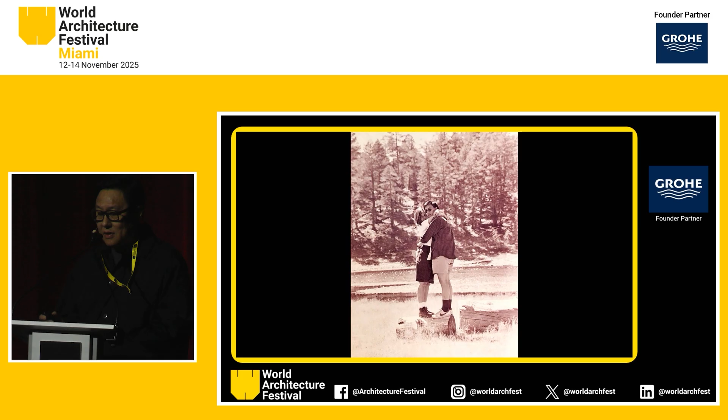Maria and I started a long time ago, and we went to school together at University of Southern California in the 80s. What brought us together was a love of nature. The one thing we learned in those years, at the height of postmodernism, was the conflict that man had with nature. We love making things, and we love getting involved. Our cultures, me from Singapore and Maria from Mexico City, was really an indicator of the way the world was going—moving eventually towards Asia. We could already see that.

When we were at Harvard, at Graduate School of Design, we encountered a very Eurocentric mentality and approach. Maria and I were very much into nature, emotion, the intangibles, and this really was an issue until we met this man, our teacher at Harvard. We learned one thing from Tadao Ando, and that was resistance—to walk your own path.

This is exactly what Maria and I did. We moved back to Asia. We lived in Japan for a few years before settling back down in Singapore and started raising a family in the early 90s. That's where our journey started.

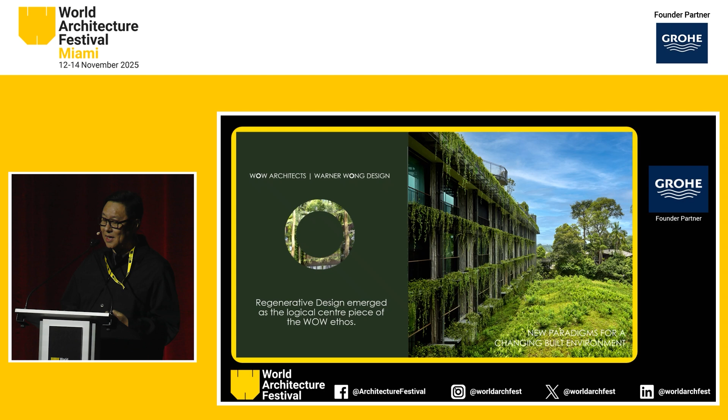Fast forward another 10 years, right through the whole period when sustainability came to the forefront of design, we realized that it wasn't enough. If you accept the fact that our planet is damaged, you don't sustain a damaged planet, you repair it. So for the last at least 25 years, regenerative design has become the centerpiece of the WOW ethos.

So I'll trace back now, in a semi-chronological order, the kind of work that we did and where we are today. In the first 10 years, we talked about integrating architecture, landscape, and interior design for a total sensory experience. We were very keen on doing everything, much to the annoyance of hotel operators and clients who always had silos—if you're an architect, you do architecture.

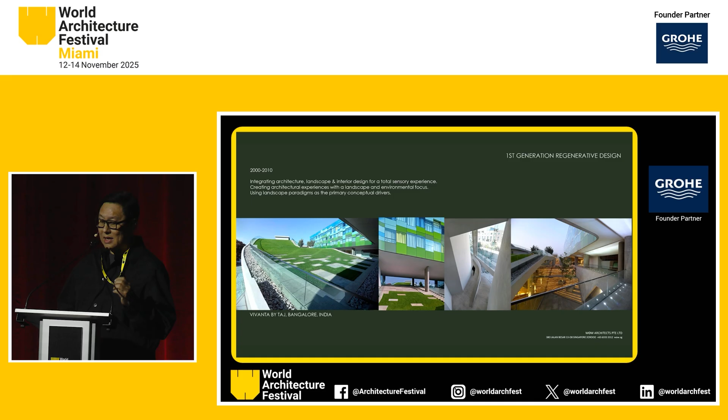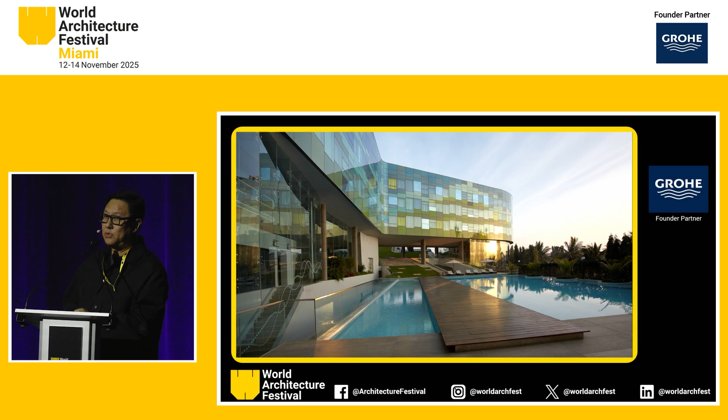So we wanted to create architectural experiences with a landscape and environmental focus, particularly environmental focus, using landscape paradigms as the primary conceptual driver. We found a willing client in Taj Hotels, who commissioned us to do this project, the Vivanta by Taj in Bangalore, where we had the opportunity to really create, for the first time, a totally integrated experience.

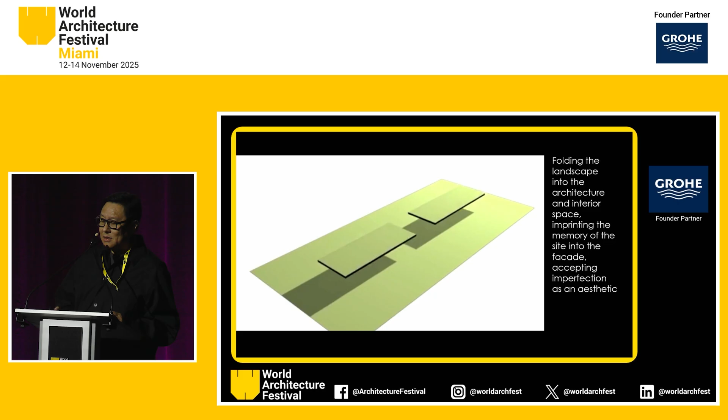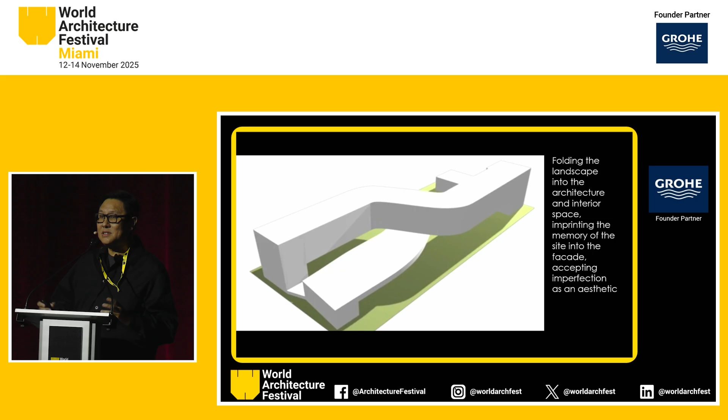We were still very much talking about the language of architecture as we learned it coming out of schools—folding, tectonics, imprinting. We were using the language of architecture to create the first generation of experiences. The way we presented our work was very much about the diagram, about circulation, about all the things you learn in architecture school that you're dying to do when you do your first big project.

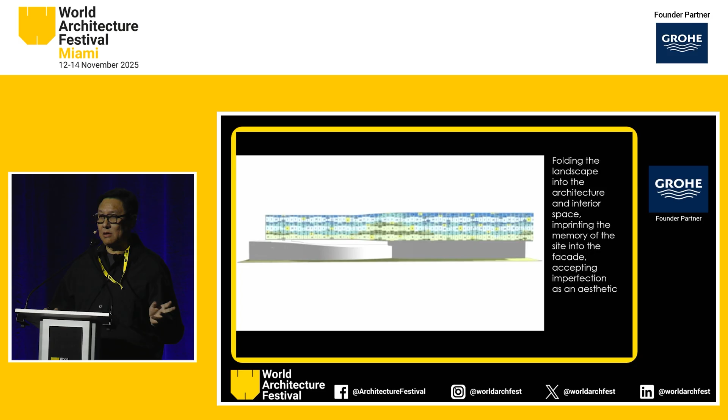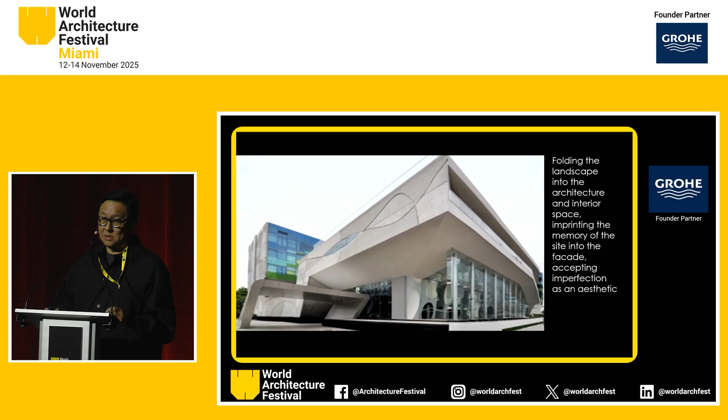So this is essentially the path that we took, and it taught us a lot of lessons. The whole idea of taking the context and making that the facade concept, I think, was a very new idea back then. And the idea of imperfection—we were building in India, right? Concrete was the most imperfect material that was malleable, and we embraced it. These important lessons created this project that drew a lot of attention because of the way that it created spaces.

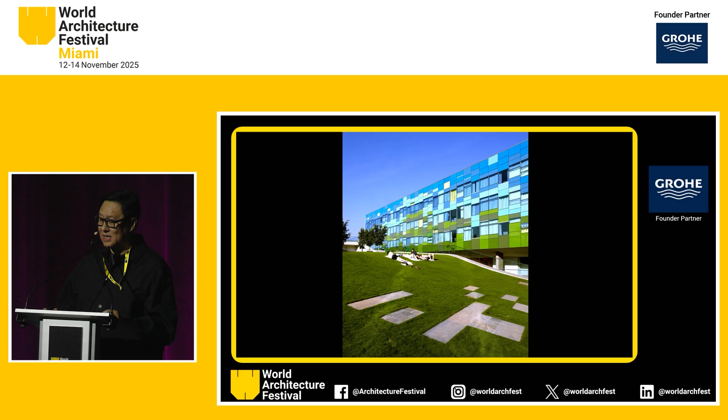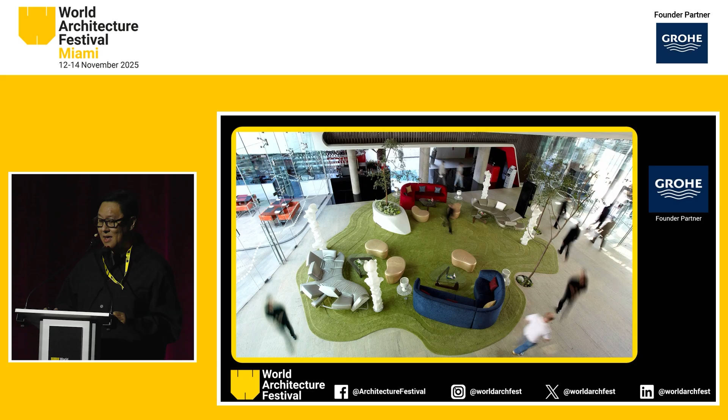We found that it was actually nature and the outdoors that made people happy. So talking back to the previous presentation, the concept of awe, the concept of emotions—this is when we realized it was possible to create these kinds of experiences. Particularly interesting was the connection between the inside and the outside, and bringing nature indoors. So this is the first part of the journey that we had.

Fast forward again, another period between 2010 and 2015, what we call our second generation regenerative design—we started talking more about eco-awareness. We realized that if you don't understand nature, if you don't understand the importance of ecology, you don't really understand how to be regenerative.

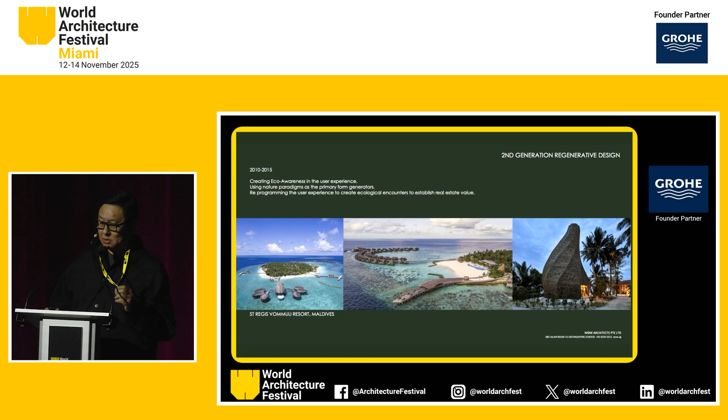So we were starting to use nature paradigms as primary form generators, moving away from traditional design language. We also found that reprogramming the user experience to create ecological encounters gave value, particularly real estate value.

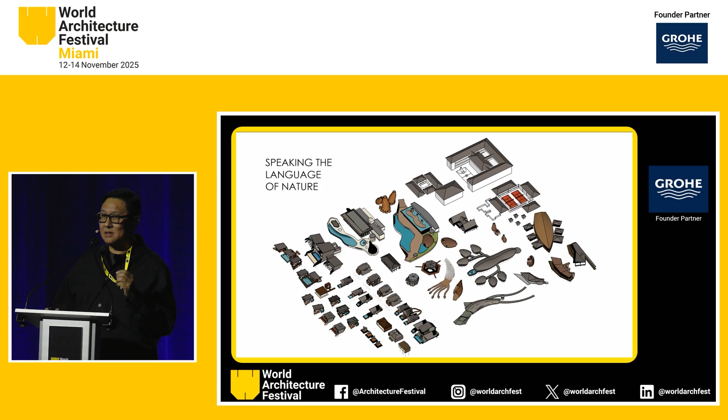So in the St. Regis Maldives, which was our first real ecological eco-awareness project, we embraced nature. This is when we realized that speaking the language of nature liberated us. We no longer had to rely simply on the traditional orthogonal Cartesian way of thinking, and it enabled us to create experiences of surprise while still having a very logical, coherent design language.

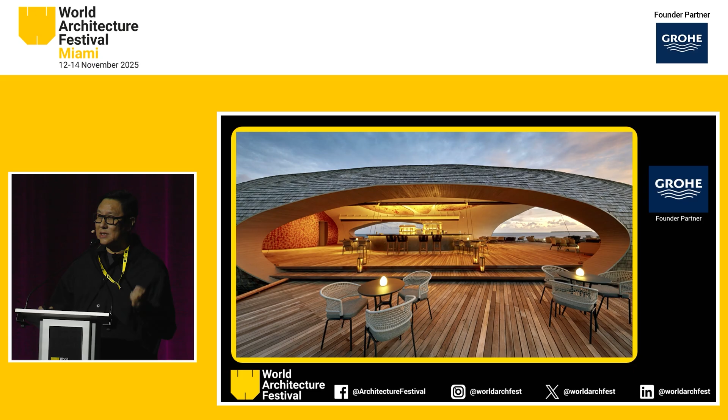In this image, the whole language came about from the ecology of this Maldivian island where the St. Regis is. It wasn't simply about talking about context in its most limiting forms. The feeling you get there is not something you can experience in a photograph. You have to be there to understand how these seemingly simplistic forms create conversations and reach a level of audience I never thought possible.

That's children, right? The kids loved it, and even the adults were drawn into the discussion. That's when we understood that here we are, we now have a possibility of creating legacy.

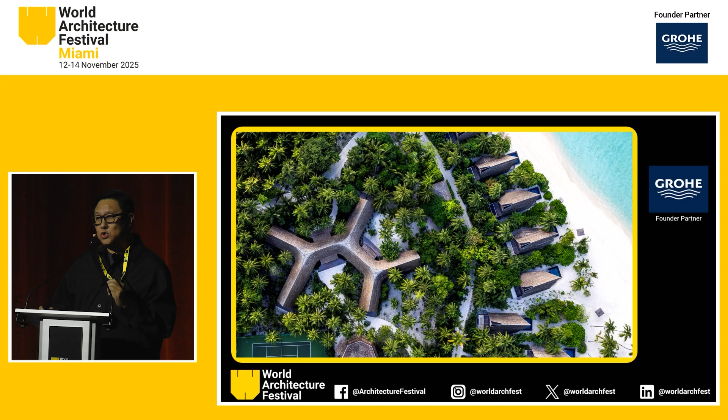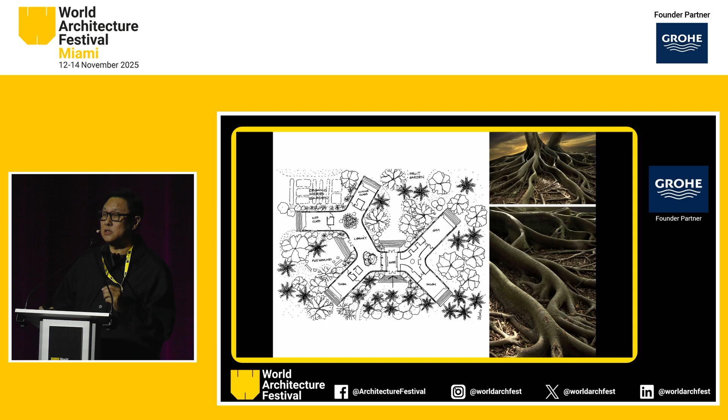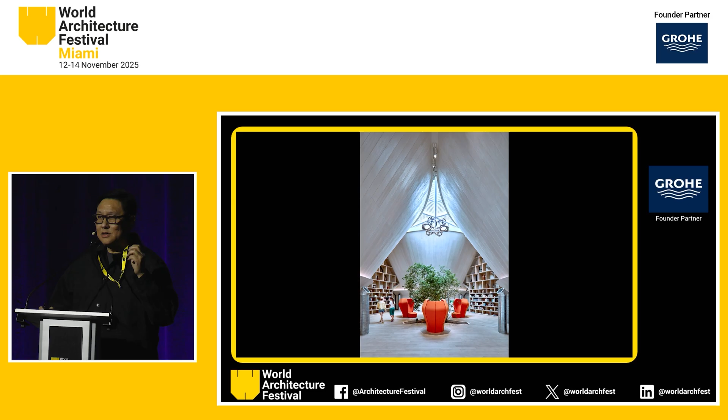In every hotel you go to, you have this thing called the Kids Club. We decided not to call it a Kids Club, but a nature discovery center. The design of the building took its inspiration from the banyan tree on site, but more importantly, what we created was a collision between architecture, programming, and user experience that was nature-based and evoked emotions for the whole family. This was a very successful strategy because now children would ask their adults, hey, what is this all about?

Where are we going? This was a revealing moment for us. 7, 8 years later, after the opening of this resort, it's still doing very well and still creates a lot of conversation, and we're very pleased about that. It's about this discovery, how you can take the most common object or artifact and create a conversation out of it, whether it's tumbled glass on the beach recycled into a chandelier or coconuts used in an artistic way.

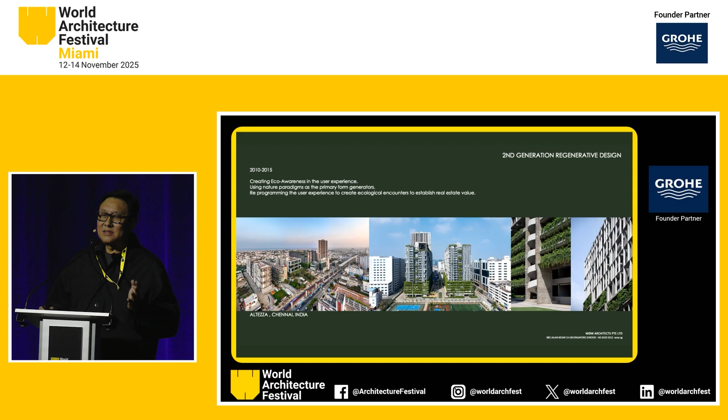Now, what about the urban context? In urban context, you still have zoning codes, FAR. Sites are rectangular or squarish or some variation of that. How do you actually do regenerative design in such a context? Well, in places like India, where we have a lot of work, we took on this challenge and realized it was not about the shape of the building that counted. It was how the user used the building or lived in it, how transformative it was for them.

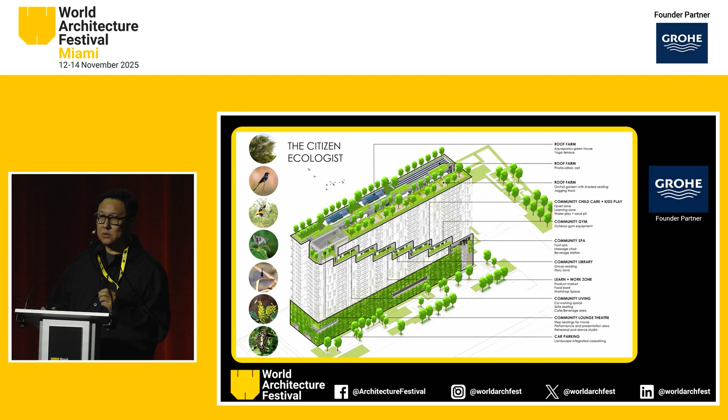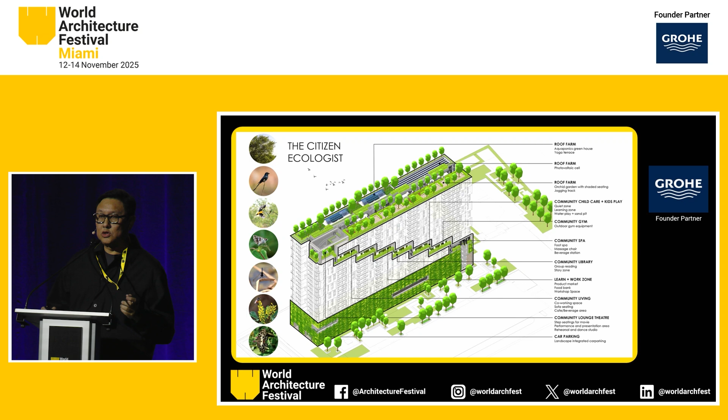So we started thinking about the concept of the citizen ecologist. Everybody who lives in this project has an opportunity to contribute. We took the landscape concept, the ecological concept, and the user experience, and linked it throughout the buildings. A series of stepped gardens, community gardens, took you up to a rooftop urban farm.

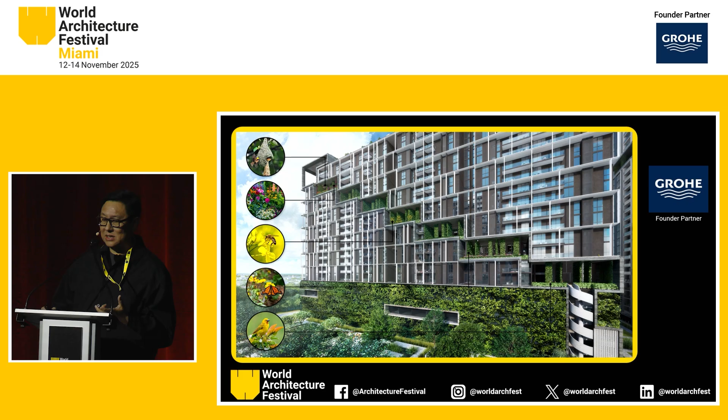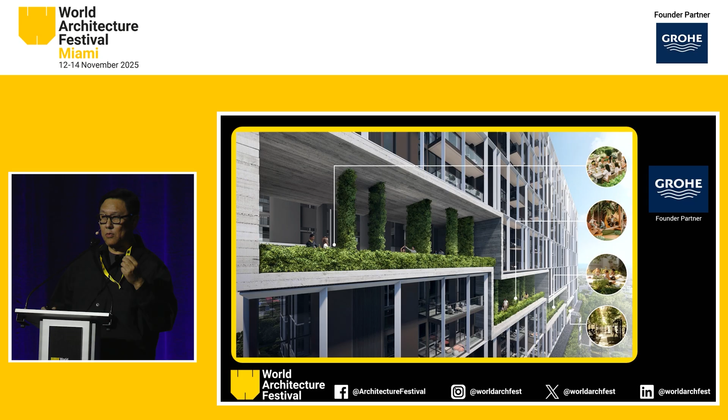What this did was essentially create an opportunity for landscape and ecology to proliferate. Here we're talking not simply about planting, we're talking about insects, avian species, mammals, bees. This educational and interactive community experience started building citizen awareness of how important the ecology is for everyone. When you have that, the community building gets much more intense, the discussions get more relevant, and you're building a legacy for the future.

These projects then took us into another realm of thinking, what we call our third generation regenerative design. That is embracing regenerative design as the primary way to repair the built environment, and whole system ecological thinking, including bringing living systems and integrating them into the built environment. This is a whole different language of discussion, to stop thinking about the building as an object, but as a substrate onto which living things grow or craft themselves or meld themselves. Reevaluating daily materials like concrete, wood, and steel, and thinking how to achieve whole system design and engineering using materials. This inevitably leads to climate and microclimate engineering.

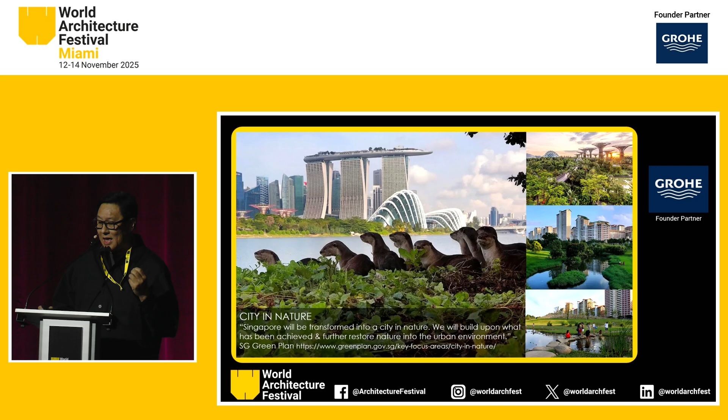Which brings me to this project I want to share with you, the Mandai Rainforest Resort. Some of you may have been to Singapore - we started our journey 60 years ago as a garden city, and in the last 60 years, we have evolved to now being a city in nature. It is our agenda as a country and as a population to live closer to nature. How do you do that? The project we were commissioned to do, having won an international design competition, is this eco resort, which is in the heart of Singapore.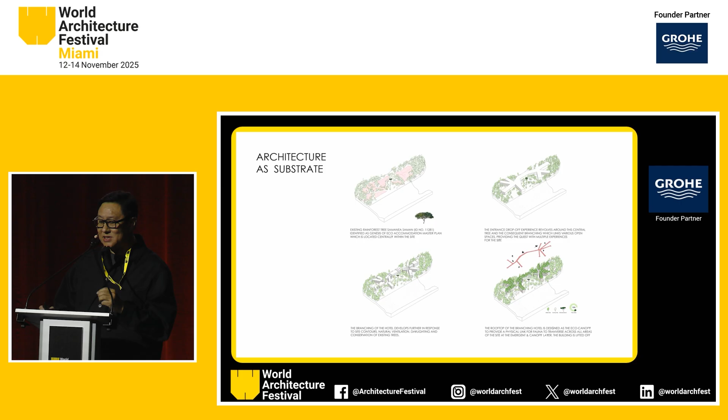It was a vine, a liana, that creeps its way through the opportunities on the site. No specific form, opportunistic as nature is. So this is architecture as a substrate, not object. And if you take a look at the site plan, you can see here that the idea is eventually you wouldn't even see the building at all. It would be completely absorbed into the jungle.

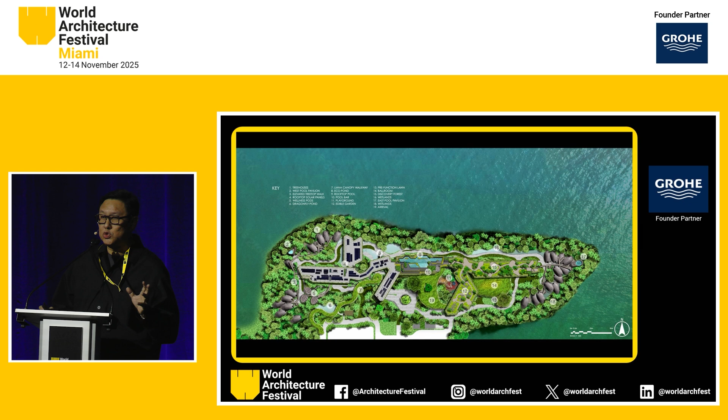This also required a change in the way we use the building. If you go to a typical zoo, this is next door to the Singapore Zoo, you have animals penned up safely, and you walk around and gaze at the animals. Here we had a total paradigm reversal or shift. We put the people safely within the building, and we allowed the animals to roam around us. Quite the reversal on how we interact with nature. Normally you look at nature, but here nature looks back.

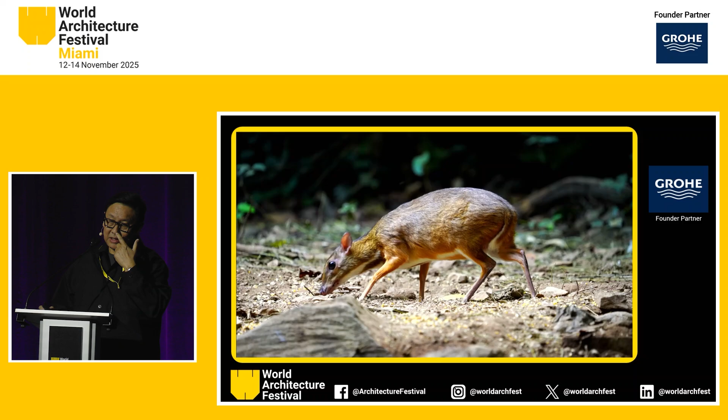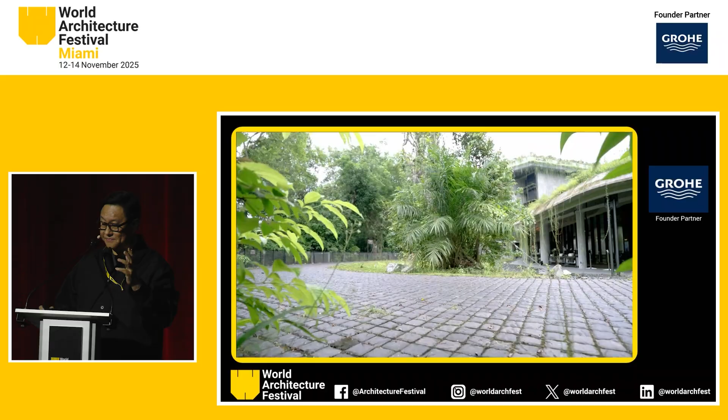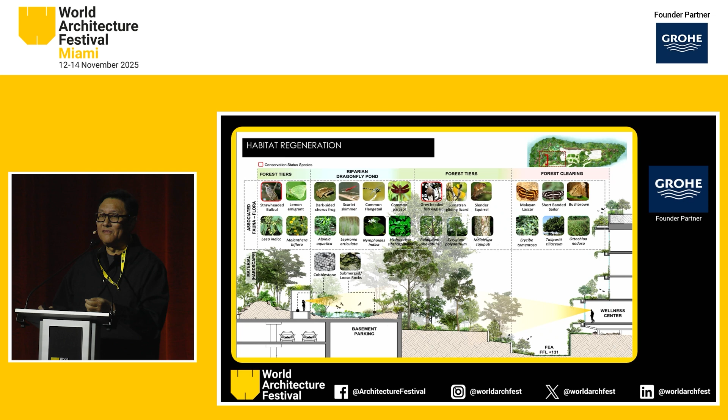So we not only designed it from a human's point of view, we designed it from the point of view of the real citizens and denizens of the jungle, how they would interact and look back at us. It was a revelational moment for us and a humbling moment, because we no longer spoke like architects or landscape architects. We needed to speak like ecologists, as people who embraced flora and fauna and understood microbial activity, the value of soil, how important soil is.

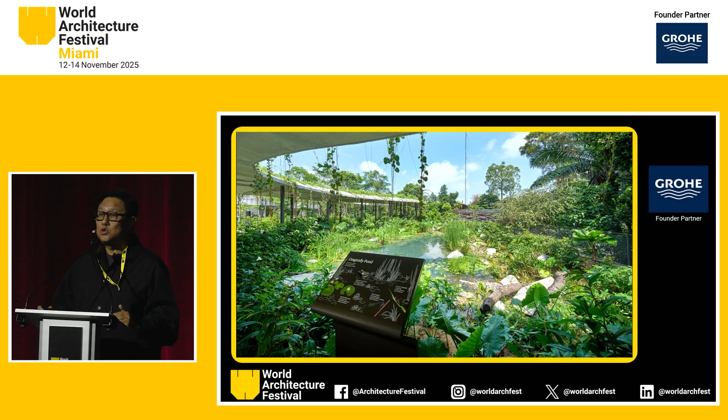And how, if we understood the power of nature, we could harness it. We don't have any chemicals on this project to control mosquitoes. We actually used dragonflies. So we created a whole series of eco ponds where we encouraged the dragonflies to grow, and they were the natural mosquito killers. This is important to us because, at the end of the day, impacting the hearts and minds of the people and future generations was much more important than any architectural design statement we were trying to make.

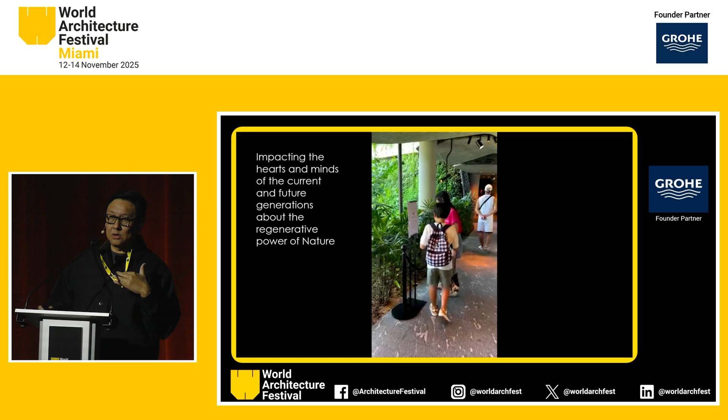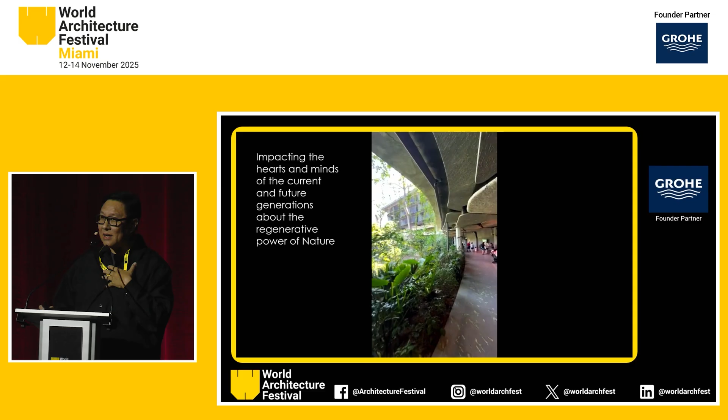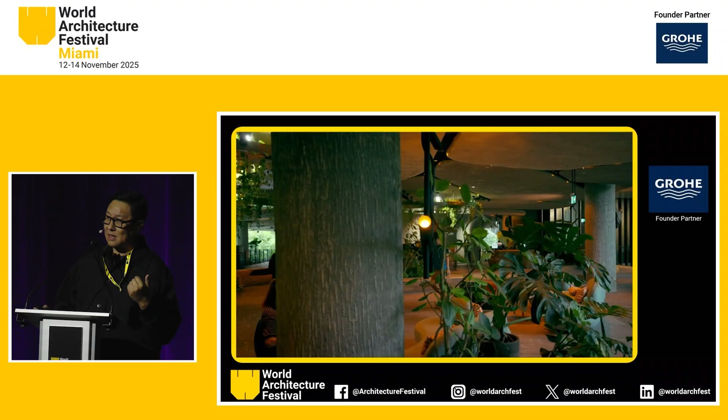The building receded into the background, and what was more important is how nature comes to the foreground. We were blown away. For example, within 3 weeks of opening, this bulbul family came to nest in the lobby and hatched younglings. It was a very humbling moment to see this, and how the people who saw it felt awe and felt healing and bought into the whole story. So I think this kind of attitude is really the heart and soul of what a regenerative design project is, bringing the outdoors into the building, letting nature come in and create the dialogue and create the centerpiece of design.

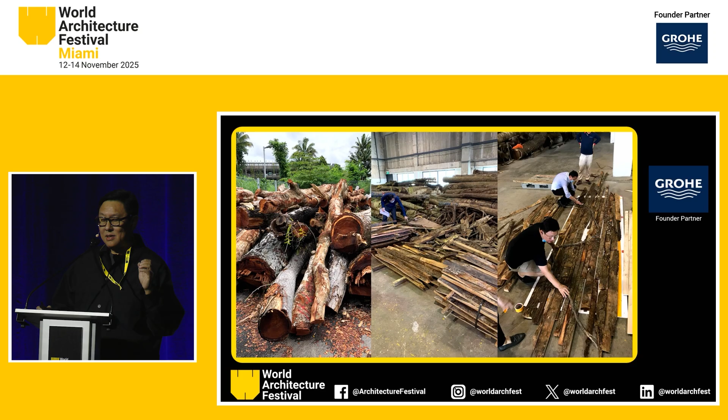So what do we do, and how do we do this as architects responsibly? Singapore has no natural resources. Well, wait a minute, we actually did have natural resources. The trees that we cut down were a resource. So rather than sending it to the scrap heap, we recycled 100% of it. Even the tree bark, which we then turned into the formwork for casting the concrete, so that we imprinted the memory of the jungle, the actual vines onto the concrete, and it became the experiential aspect of the project that was a living memory of the jungle.

Diversity. Not just diversity from a humanistic point of view, but biodiversity forced us to think about universal access. Universal access not only for humans, but all the creatures of the jungle who were free to come into the resort. So be prepared for snakes.

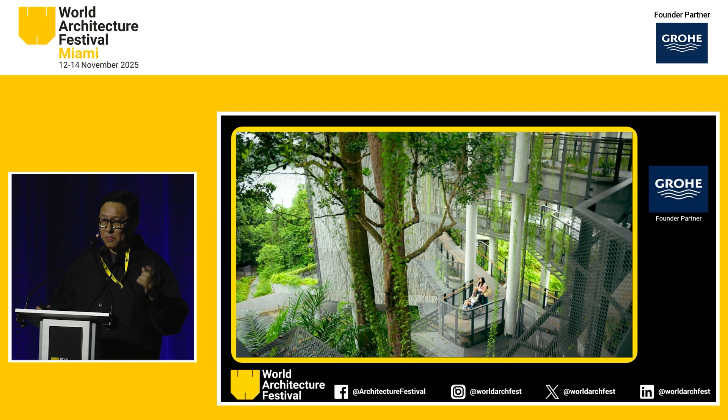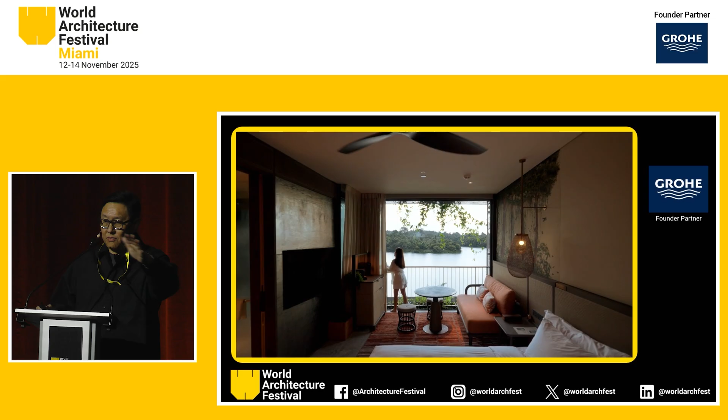And it was all about internal spaces as well. What is an internal space in this regard? Well, we turned every room into a veranda. If you know what a veranda is, it's an indoor-outdoor room. And we gave the guests the choice to actually control the amount of energy they use. They could completely just live with the warmth, or they could augment it with cooling. We wanted to give choice the responsibility of the energy utilization.

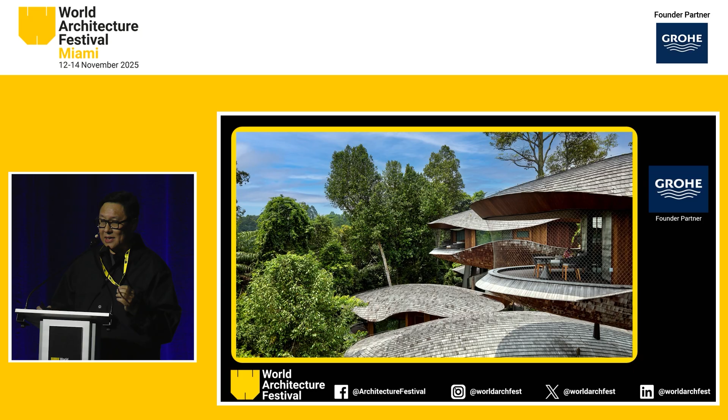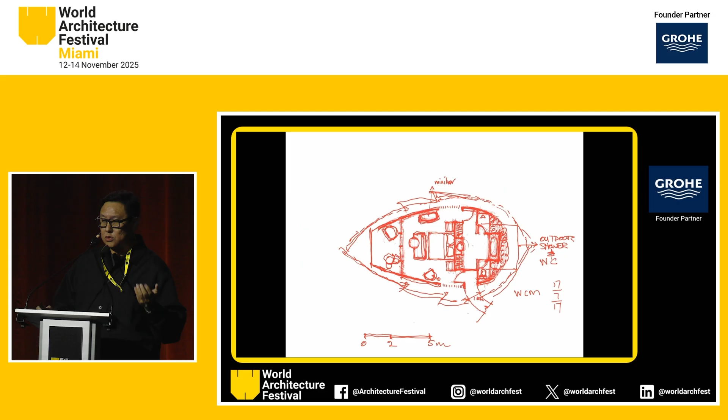Now, part of the resort is a typical hotel room. There are 338 keys here, but 24 of them were tree houses. And the tree houses took on a metaphorical narrative aspect, which is, in this case, the seed pod. What we wanted to do here was use the seed pod as a mnemonic device that spoke about the opportunity of being in tune with nature.

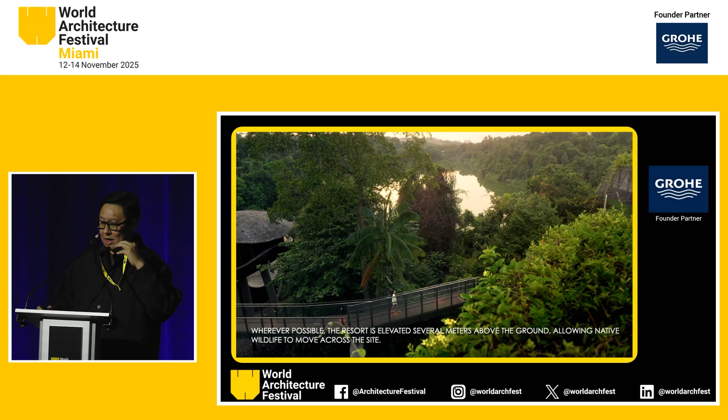So these tree houses are elevated on stilts. They occupy the deepest, densest part of the jungle. And at the end of the day, it was also an opportunity to showcase technologies that have been around for a very long time that maybe we took for granted.

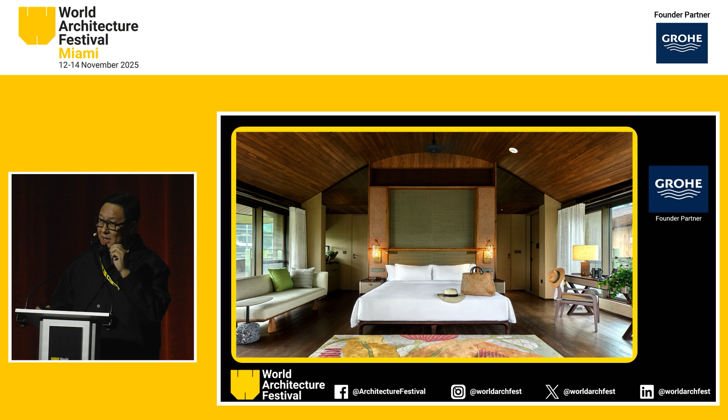We used passive displacement ventilation in this case. It wasn't about the regular air conditioning system. Your body heat generated convection currents that cooled the room and used 40% less energy, if you decided to use it. It wasn't about cooling the space, it was about cooling you, the occupant.

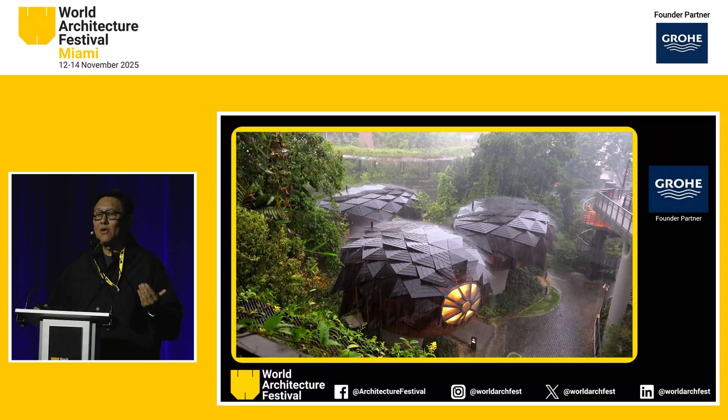The other thing that was very important to us was embracing all kinds of conditions. It's called a rainforest resort for a reason - it rains a lot. We wanted it to be as beautiful in the rain as it was in the heat. And water as a resource was educational - we wanted the children in particular to see that water could be harvested, could be collected.

So, talking about the sustainability initiatives, it's Singapore's first super low energy resort. Solar, of course, rainwater harvesting, of course, but more importantly, what we wanted to do was create a whole system ecology within the building.

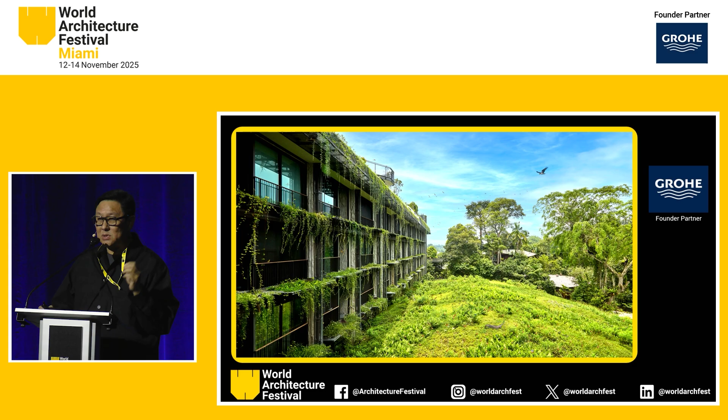So 6 months into it, it's already pretty lush. 10 years later, we hope the building won't even be seen. And so this requires us to really have planned for the ecosystem that would come back to it.

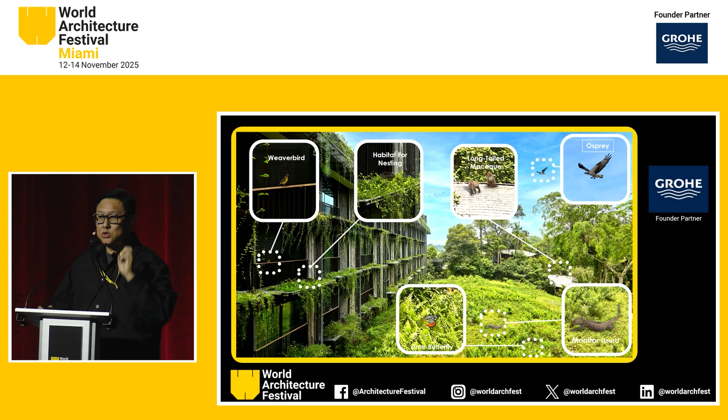Certain animals, like colugos, are residents of particular trees. You cut down that tree, that guy may never come back again. So this is a very key understanding that we have. When you speak the language of nature, you have to be sensitive to a lot more than just humanity and human beings.

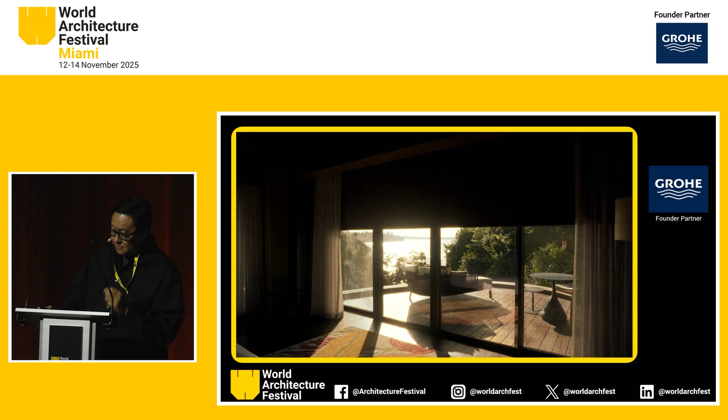So I'll come now to the final part of what I want to share with you today, looking forward into the future. So these are statistics which we did some research on. Global building floor area is expected to triple by 2060. That is the equivalent of adding an entire New York City every month for 40 years. And a lot of this is going on in Asia and in the Middle East.

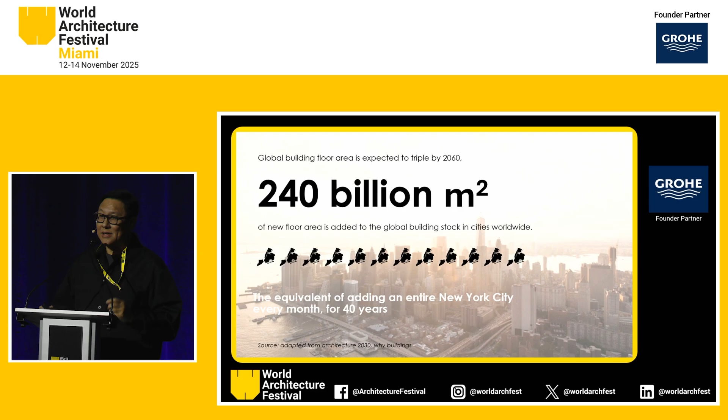Forest coverage is at a tipping point. We have 1/3 of the planet's land, and the net loss per year is still more than anything we can plant back artificially. So we're experiencing the loss of our forest coverage every year, year by year.

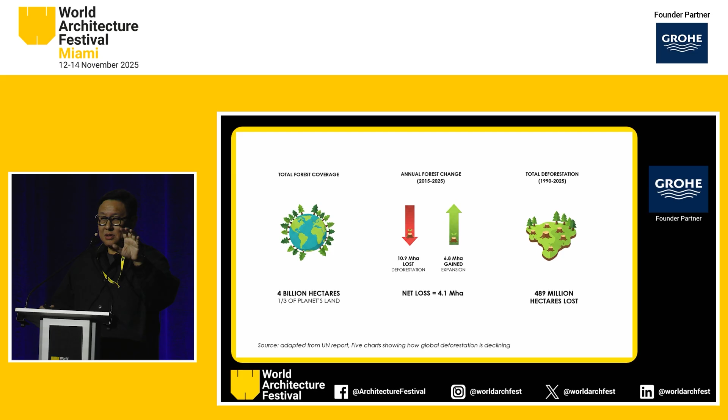But we can't stop building, can we? After all, everyone deserves a home. We can't expect the people in Africa or in India to not be urbanized. So what do we do now?

Recognizing the need to totally review existing policies and practices and repurposing the economic equation in the built environment is a thing that we all have to do. We really need to relook at all of this in order to achieve regenerative design outcomes - exploring, researching, and testing policies and paradigms to create wholesome built environments by going back to basics.

This is a must-do. So I would encourage architects, landscape architects to work together and go back to basics and relook at how we do the built environment.

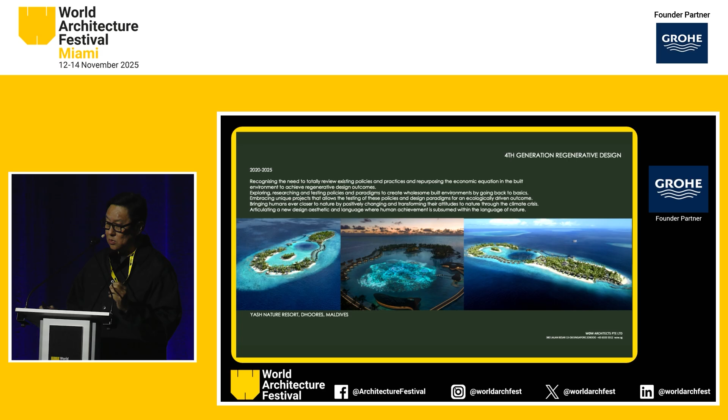And so we at WOW, we want to embrace unique projects that allow us to test these ideas - by bringing humans ever closer to nature, by positively changing and transforming their attitudes to nature through this climate crisis, articulating a new design aesthetic and language where human achievement is subsumed within the language of nature, not simply the language of design that we're used to.

So climate, resources, land use, coastal development - these are issues of urbanization as we build cities, particularly along coastlines, as sea levels begin to rise and more violent hurricanes and typhoons come along. We really need to rethink how we do the physical placemaking.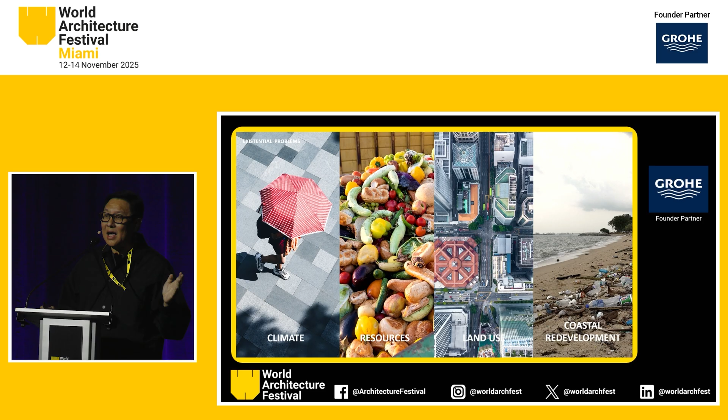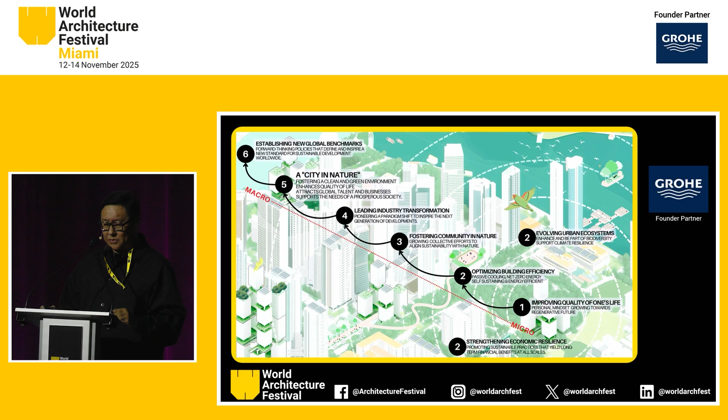That will inevitably come. So taking our lessons that we have learned a lot in Singapore, the one good thing about Singapore, as some of you who have been there know, is we have strong government and we have strong government involvement in the built environment.

So this has forced Singapore architects to really get involved: improving the quality of one's life, strengthening economic resilience, which is very important for the built environment, evolving urban ecosystems, the morphology or shape of the city, and fostering communities in nature.

Singapore has 320 kilometers of nature trails on our small island, leading industry transformation. How can architects, through discussions in industry, affect the outcome of the construction industry that we depend on to do our work? These are conversations that need to happen in order for us to create cities in nature.

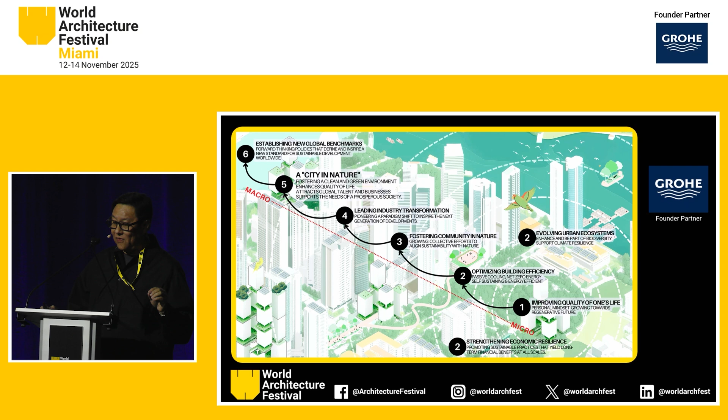All cities should be cities in nature, in order for us to create new global benchmarks. New global benchmarks is what we need. And this is a diagram that says a lot, I think, about every city.

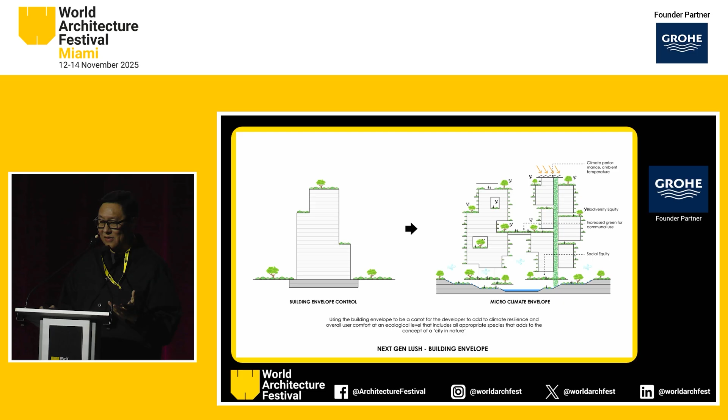Building envelope controls are pretty standard in many urban environments. The planning regulations dictate what you can build. But what if we were able to deconstruct it using other criteria? Climate, for example, bringing user space up into different levels, rejigging the jigsaw so that we created a much more inclusive and open architecture that utilizes resources.

And we need to incentivize the developer. No one's going to do anything for nothing. So if we give them enough incentive, particularly in developing countries where planning regulations are much more backward, I think you will see good outcomes.

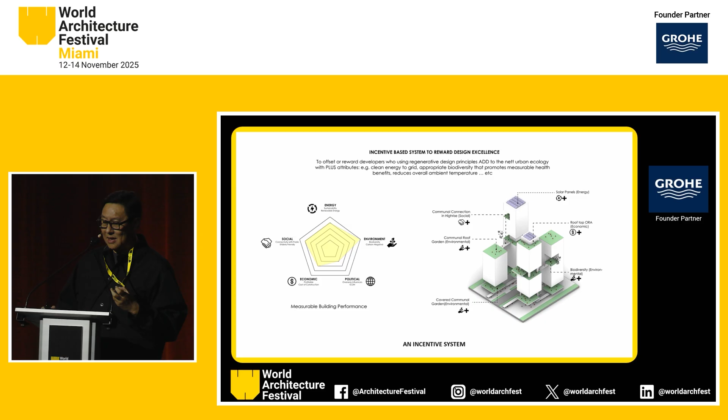So for the projects we're doing in places like India and Indonesia, government agencies need to partner with us to create these new ways of thinking, in order to create the reward system to encourage them to be regenerative.

Right now in Singapore, we used to think 50 years in advance. We thought that was enough. But if you're looking at planetary change, like cutting back 2 degrees centigrade, 50 years is not enough. You have to plan for 100 years. And all of us are involved.

You are the citizen ecologists, and your clients and the end users of your projects are all participants in this. So we think that, while we are promoting this in Singapore, we aim at cooling the whole island. Imagine being able to cool the whole city, because then you can really combat climate change. It's not building at a time, it's a city at a time, right?

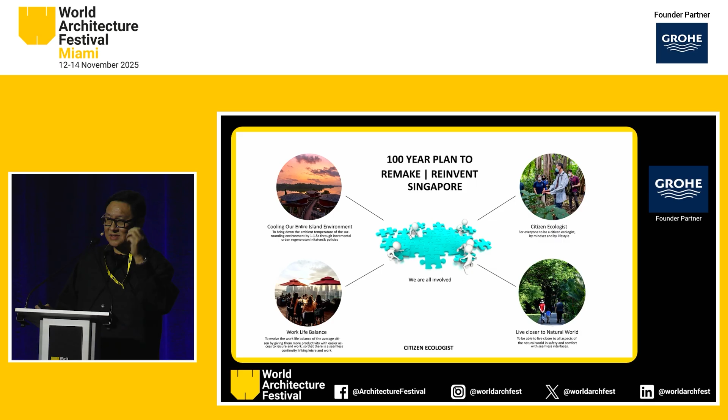So what will this look like? I think this is when design is really powerful, to create visualizations of new ways of living in these urban morphologies that we could create - 3-dimensional green cities that could really change the way we look at habitats, ourselves included.

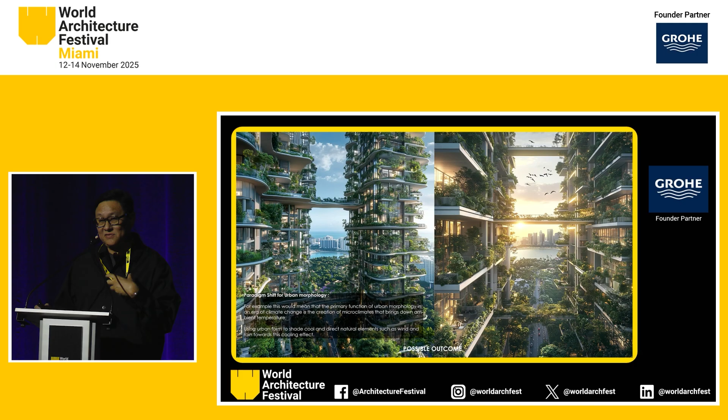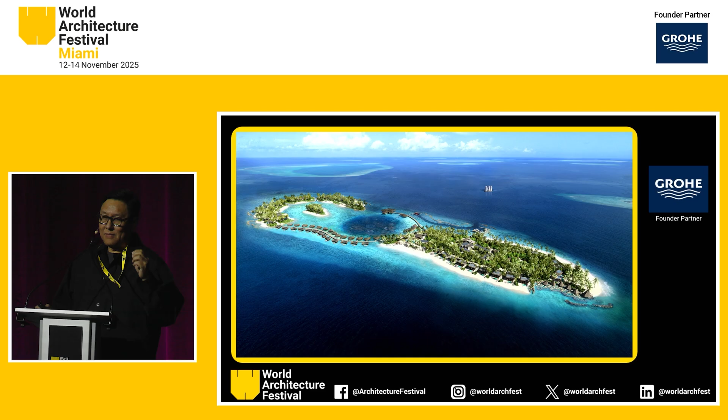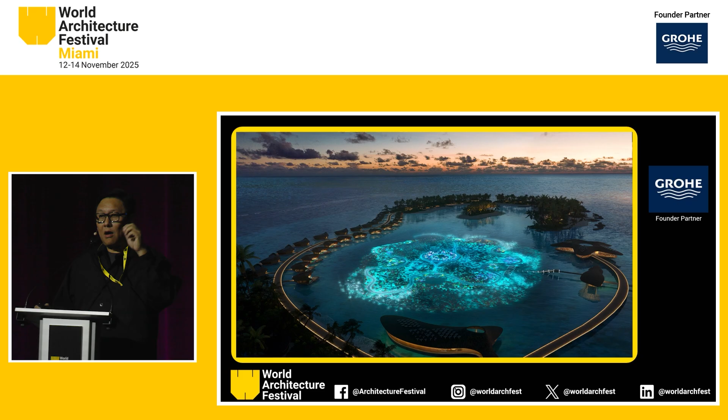We also have some interesting projects now in coastal areas and remote locations like islands, where we not only go in and develop islands, we create islands out of blue ocean - literally blue ocean technology - where we have the opportunity to not only design on the terrestrial aspect, but even in the marine aspect.

Land is like a pyramid - just the tip of the land above the ocean is what we deal with. What happens to everything else underwater? It's a continuity. So architects stop thinking at the coastline, but we shouldn't. We should continue our thought down into the oceans, because that's where life is.

And so in our projects now, we think about how we can address underwater environments as well, planting underwater gardens that regenerate coral reefs. This sort of thinking, a much broader scale of imagination about the possibilities and the engineering required, is really going to be the forefront for what we do.

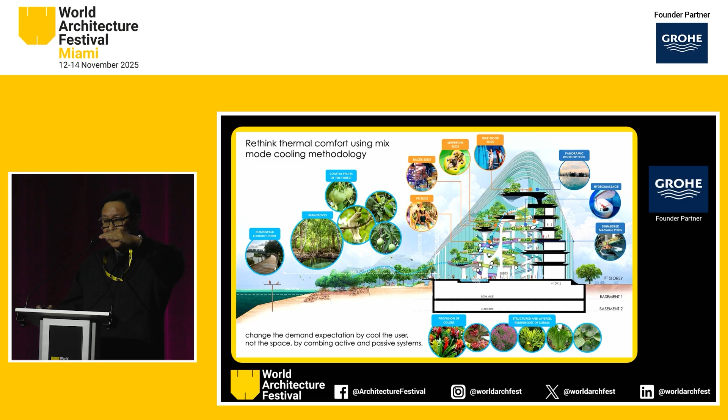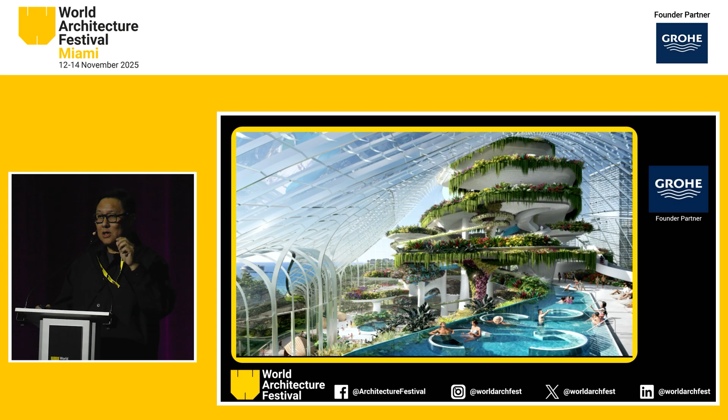When it comes to building buildings, it's no longer enough to think about the building envelope as a climate-controlled device. We have to rethink thermal comfort completely, with a mixed mode cooling methodology from the ocean through the landscape up into the building. So our projects now take a much more ambitious approach, where we are not cooling the space per se, but cooling the occupants in the space using various passive and active technologies for thermal comfort.

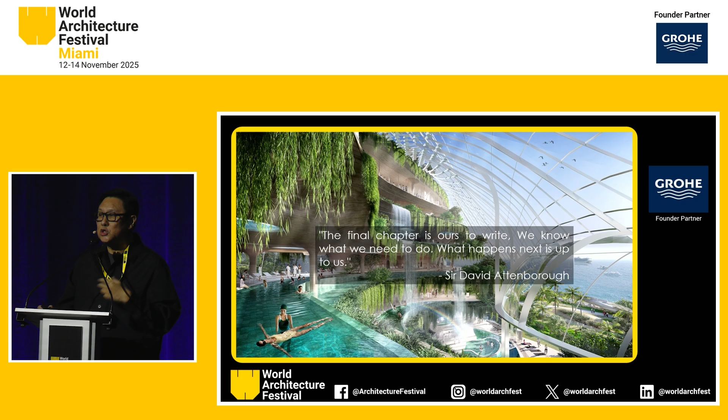So to conclude, I think this says it all: Sir David Attenborough said, we know the problems, and what we do next is really up to each and every one of us. Thank you.

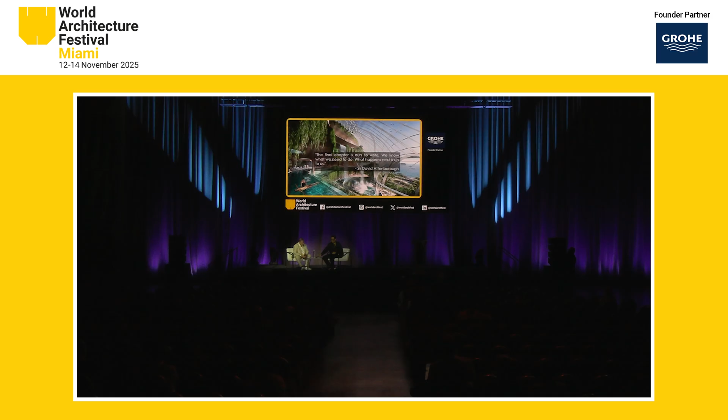There's always this saying that you don't plant a tree to sit underneath it, you plant it for the next generation. I think that's the mindset that if you really want to solve the climate crisis, you can't think about the here and now, you have to think beyond. So I am optimistic, I would say, because I have no choice.

You have no choice, we all have no choice. If you love your children and your grandchildren, you'll be thinking way down the line.

From Singapore's point of view, you have a very dirigiste government, very interested in the built environment. What are the drivers behind current thinking about what should happen? For example, that idea that when you create a new building you should replace the ground you're losing with terraces and gardens, so that buildings sit on the land lightly because the land is actually recreated there. Is that sort of thinking now being pushed to new levels?

I think when we started this whole idea of a city in nature, we were coming from 50-year-old, at least 50-year-old, planning policies that came out of traditional Western economic models, particularly British town planning, as an ex-colony. But as we have evolved as a nation state, we realized that considering our situation where we have limited resources, particularly land, we had to rethink. But economic resilience is putting economics first, so the built environment is struggling to catch up, quite honestly.